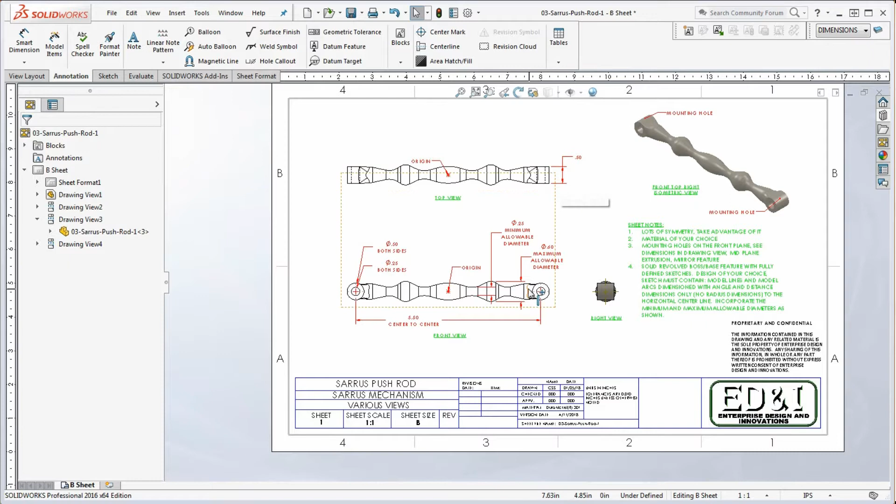And then we're going to do a bunch of freehand sketching in the middle. So let's go ahead and get started on this.

We're going to start with, you've got to consider the orientation of the Sarrus mechanism. We're going to be considering the front plane. And I'm not going to define a material here for you, I'm going to let you do that. It could be wood, plastic, some sort of metal alloy, steel, copper, aluminum, titanium, whatever you like.

So we're going to start with the front plane, and we're going to go ahead and begin to sketch. So it's going to make that normal too. Let's go ahead and put in some center lines.

So we're going to put the center line here down the middle. I'm going to go ahead and grab the center of that center line, select the midpoint, select the origin, and we're going to make that coincident. We're going to stretch that out just a little bit.

We're also going to be putting in a vertical one. So we could do the midpoint line if you want to do that. You want to make sure you convert that back into construction geometry. And then let's go ahead and put that in.

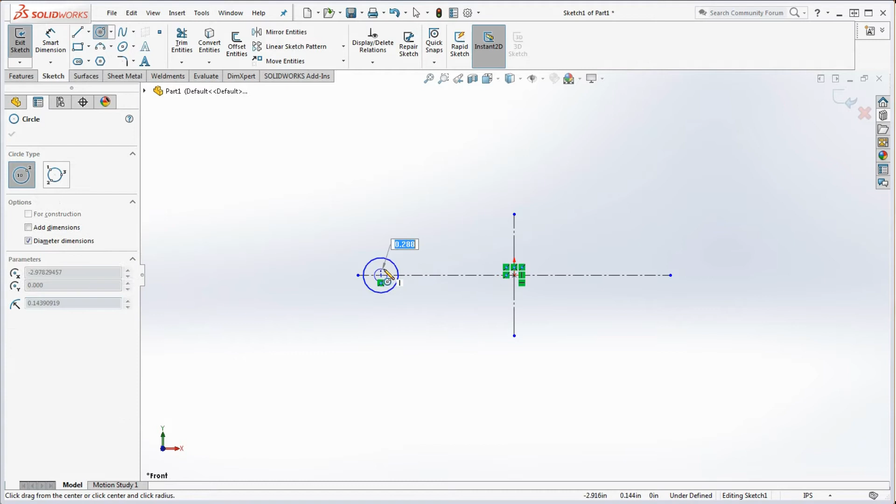So we're going to put in a couple circles on one side, and we're going to make those concentric circles if you want to do that. Remember, the inside diameter is going to be 1/4 inch, so 0.25. Outside is going to be 0.5. And remember the distance between the two.

If we were to click on any of these circles and go to that center line in here and then drop that on that side, double dimension or radius or a diameter dimension, that's going to be radius, single dimension. We're going to make that out there, make that 5.5, and stretch our center line so it goes through that. And then we're going to go ahead.

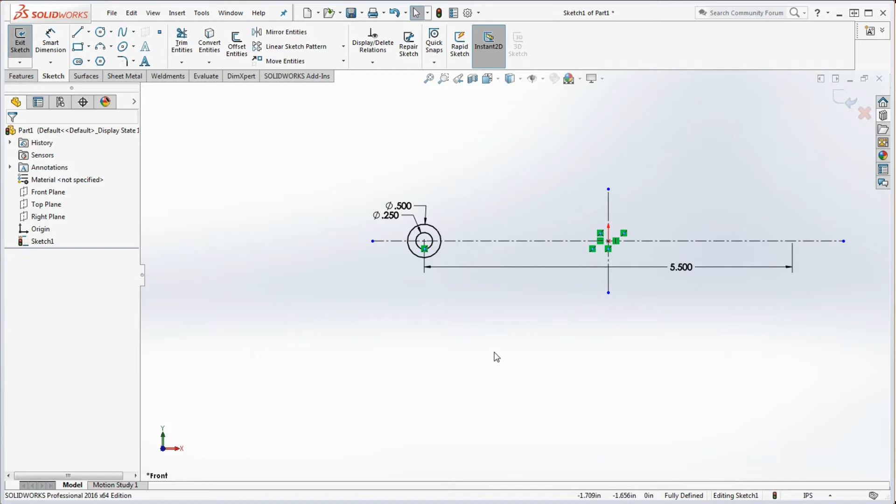Now we can do this one of two ways. We can mirror this as a feature or mirror this as a sketch. I'm going to go and do that as a sketch because I think I might save a couple mouse clicks if it did that. We're going to go ahead and select all that center line, our vertical center line in here, and now we're going to go ahead and mirror that to the other side. So now we have that in place.

We're minimizing our dimensions. We only have 3 dimensions that define this whole thing. You don't want to go over here and add the same dimensions you have over here. It just looks really hokey when you put that into a drawing.

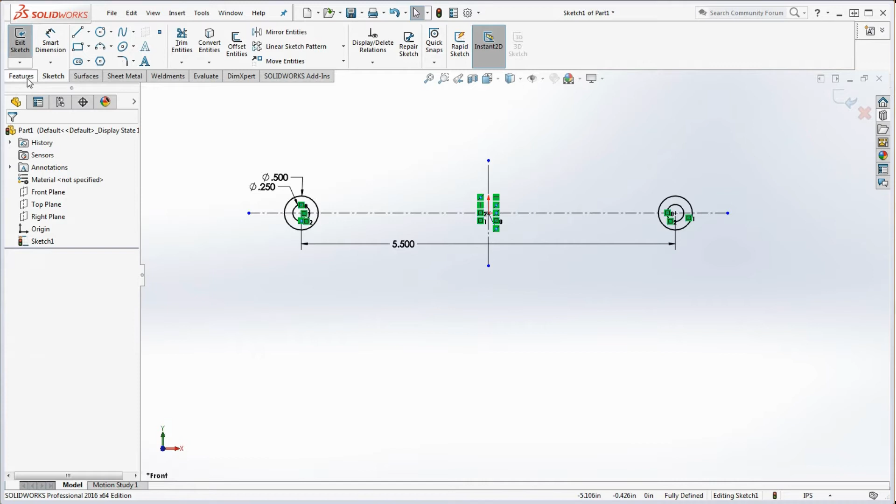So let's go ahead and extrude this. Extrude boss base, mid-plane. You want to make sure you do mid-plane. So we have that plane that's going to be right down the middle, which is going to be the front plane. And we're going to give that a specific distance of 1/2 inch. And then go to the green check mark.

Okay, so let's not forget to rename our features. We're going to call these our connection bosses or something similar to that would be good. So connection boss, typically not a dash in there, but we'll just call it that, or we can call that our base feature if you want to do that.

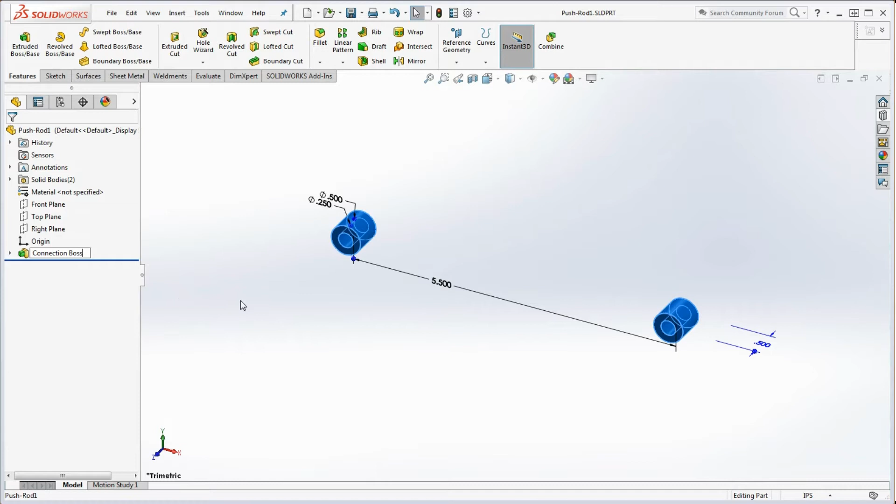So the next thing we're going to do, we're going to go right back to the front plane. We're going to go ahead and sketch on that, and we're going to do the same thing as before. We're going to start with some center lines in here. So we're going to go to sketch, go to center line, and go ahead and do kind of like what we did before.

And we're going to make sure that these stay in the middle too. So I'm going to select the midpoint in this, go to the origin, we're going to make that coincident, stretch it out a little bit. You can do the same thing going vertical.

I hate to do the same thing twice, so I'm going to go ahead and do the center line and exaggerate that a little bit. Right click in this, go to midpoint and select that. We're going to make that coincident. There's one thing we want to do here too, you'll notice that's not black, it's still blue, so let's exaggerate that a little bit. Select that, let's make that vertical. You want to make sure it's black.

Remember, the endpoints of a center line don't need to be fully defined for the sketch to be fully defined. So if we rebuild that as sketch number 2, it doesn't have that minus sign, which means it is fully defined.

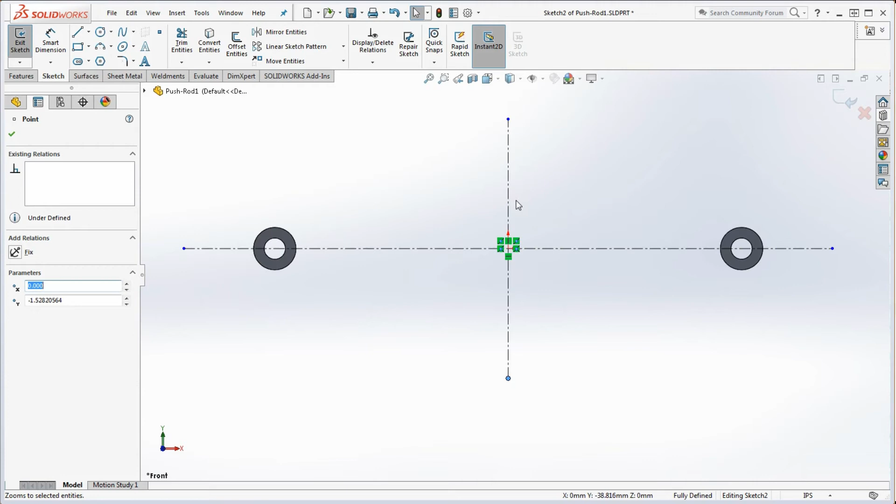So let's go back to edit sketch, put that in place, and let's put in our minimum and maximum diameters on what's going to be in the middle here. That's going to be the center revolve. So let's go ahead and do this.

We can put in a couple center lines off of this one. We're going to put one in, it's going to be 0.6. One's going to be 1/4 inch.

The way we dimension this, we're going to dimension that point to that line, because we can't really do the line to the line. If we try to do that and go over that line, escape twice here, once we do an ordinate dimension, it's not going to let us go over, it's just going to let us stay on that side. But if we go between a point and that center line, now we can do the single dimension or the double dimension.

So we're going to put that one in place, make that 1/4 inch, and this one's going to be 0.6 inches. One's going to be our minimum, one's going to be our maximum.

So we're going to go ahead and we can, if we want to. Again, we're kind of considering this for a drawing, but we can call this our maximum dimension.

You probably want to make that capital letters. It's a standard for drawings, you want to make sure you're using capital letters. I know in the modern sense capital letters means you're kind of shouting at somebody, or trying to get somebody's attention. But here, you are really trying to get somebody's attention in a drawing. So that's what you do.

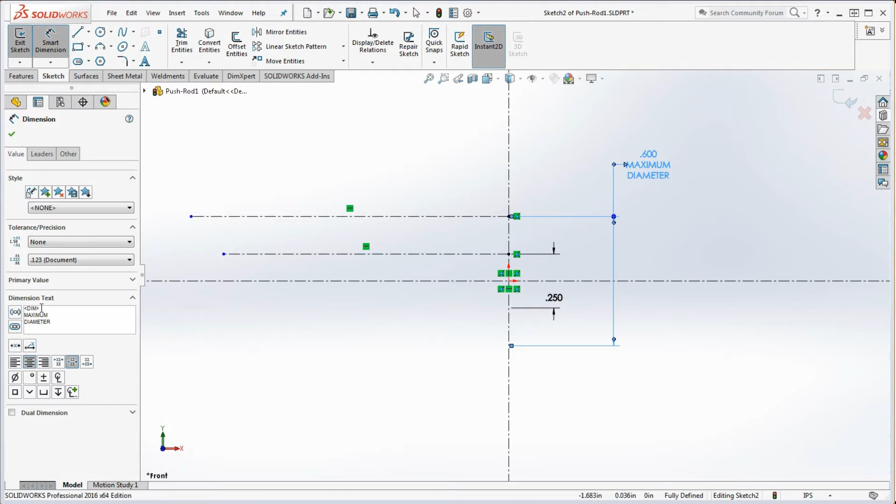That one of them is going to be a maximum diameter. What you do is click on that dimension, and below that dimension text, below what's in the brackets, it's going to give you the value that's in there. You can type in some text after that, or below it, or on top of it. I'm going to go ahead and borrow that, because I'm not a fast typer.

If we're going to do the same thing down here for the 1/4 inch dimension, we're going to put that in there, paste it, and this one's going to be minimum.

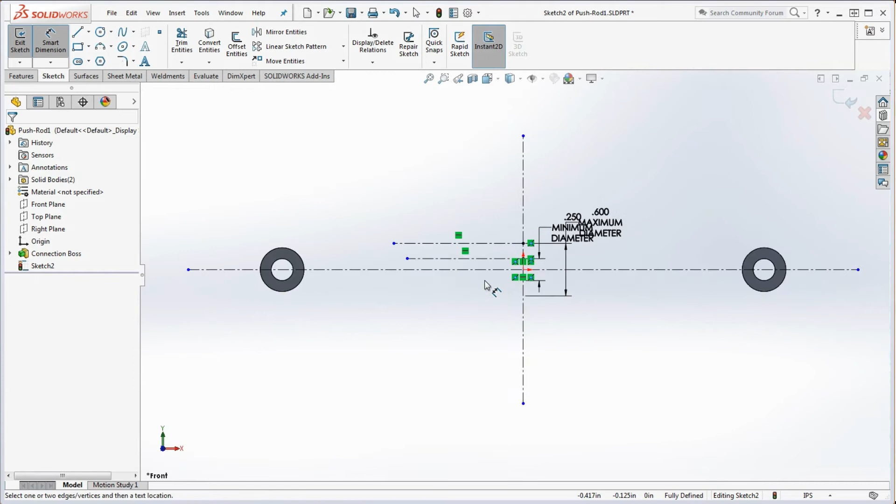Okay, so there's our 2 dimensions. We're going to keep that in place. We're going to stretch that apart, stretch that over here a little bit, and now we're going to go ahead and put in our dimensions.

We're going to put in not just our dimensions, we're going to put in a series of lines and arcs, and we're going to define this not by putting radius dimensions on the arcs. We're going to define everything to that horizontal center line.

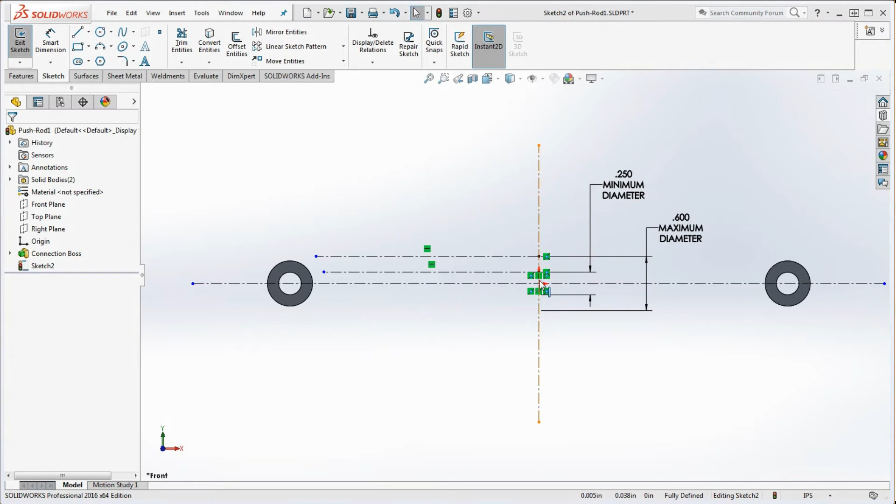Okay, so let's start putting in some of our arcs and lines. We're going to start over here on this line, over here, that vertical center line. We're going to sketch everything out on this side and just on the top.

And to maintain that symmetry, we're going to take everything we sketch out there, we're going to mirror it over to the other side. And then we're going to revolve that around. I'll show you how to do that.

Conceivably, we could probably use style splines or a spline to do this, but let's practice by using arcs and lines as a requirement for this part. We're going to use arcs and lines.

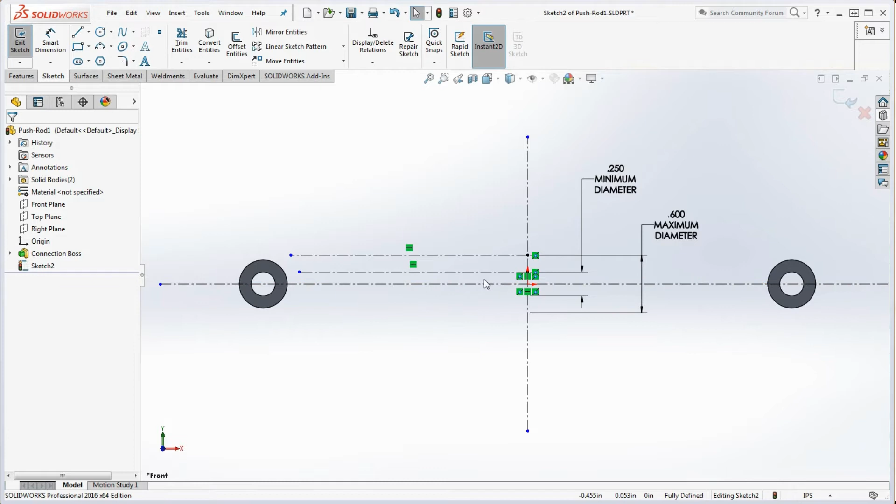I'm going to show you how to put that together without using radius dimensions. We're going to be using distance and angle dimensions instead. And we're going to be dimensioning everything to that horizontal center line, because that's measurable, we can measure from that.

So let's start with an arc. We're going to start with a 3-point arc. We're going to start over here, and we're going to sketch that down a little bit.

We're not going to go all the way up here to that line, which is going to be our maximum. We're going to make that in the middle sometime. And somewhere in the middle over here too, we're going to meet the minimum. So we want to make sure we sketch between these two lines. One thing I want you to do here too is do your own thing.

Don't put in the dimensions and the series of arcs and lines that you're going to be putting in here. Don't do mine, don't put in my dimensions. Do your own stuff. I'm just going to demonstrate this real quick, how you can do that.

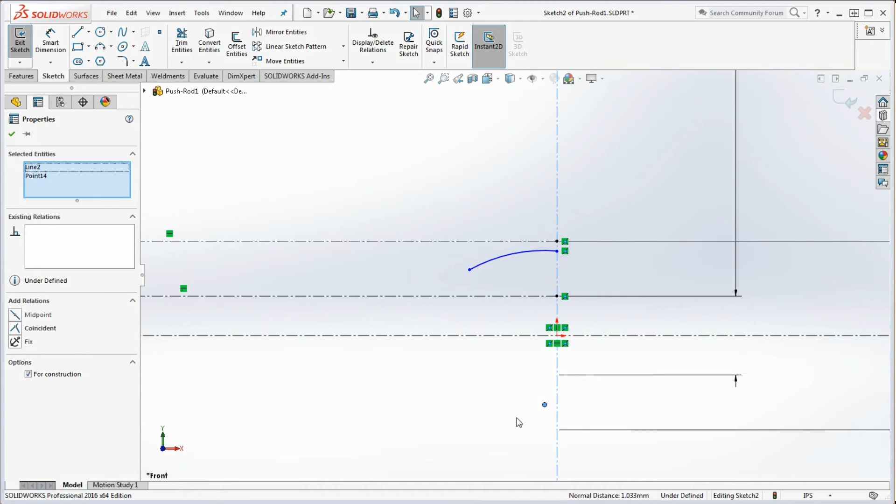So if you want to start with an arc up here, the center point of that arc's here. If you want to make that tangent to the other side, which you probably should do, we'll take the center point of that arc and that vertical center line, and make those coincident. So it'll be tangent to the other side, but when we mirror that over, we're going to have to redefine that a little bit.

So we're going to have to think about how we're going to do that. I can show you a little trick on how to do that too. Once you get that in place, let's go ahead and put in a line. We'll just go between arcs and lines. Make sure that that's a tangent.

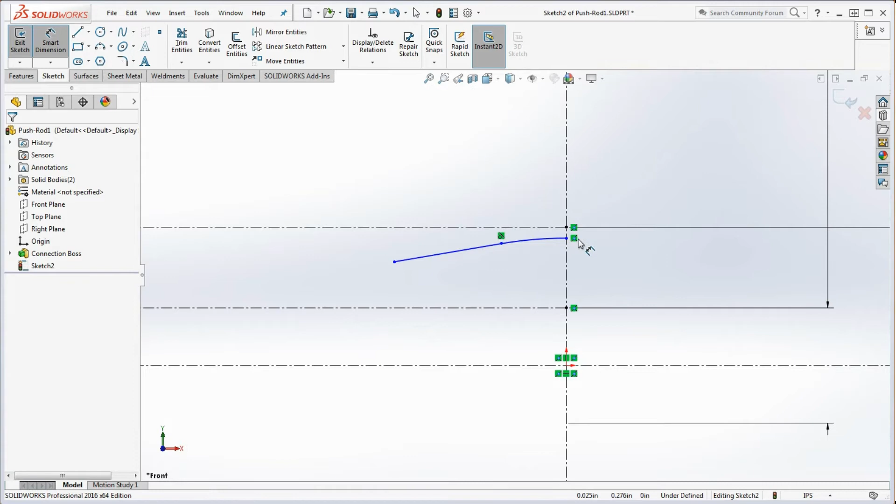Let's define that a little bit. So we're going to put in a distance relationship between maybe this point and that center line. We're going to go over halfway. Remember, you want this not to be a radius, but a diameter dimension. So this really is now a radius, but that's going to be a diameter. We're going to make that a diameter.

And don't have run-on dimensions in here. You don't want to have a bunch of digits after the decimal. Let's make that a little bit clearer and just type in 0.55. So now we can take this point and this line over here and define that too. Put that over halfway, maybe 0.5, make that half an inch. And it still isn't fully defined, so let's see what we need to do.

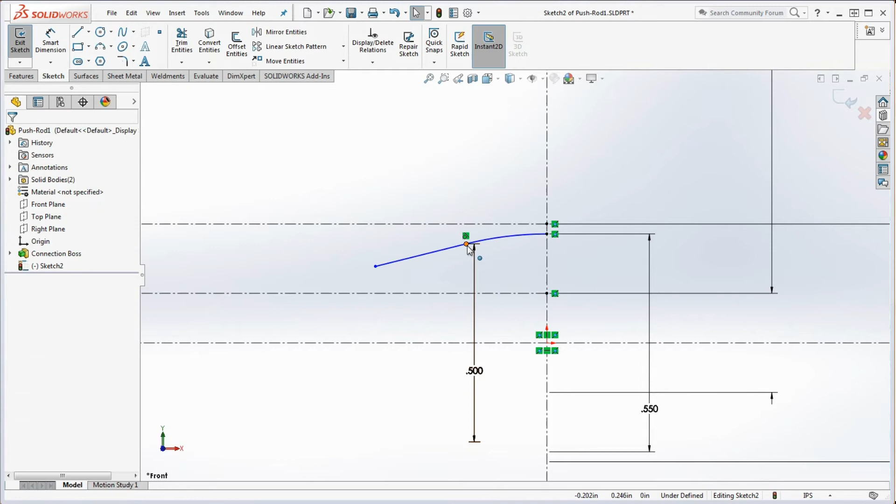You can see that with that straight line in there, we could probably add an angle dimension on that to get it fully defined. I'll define that arc. Or another alternative is to take a distance dimension between that point and that vertical line, which can't be measured very easily. So we're going to go ahead and put in that angle.

We're going to go ahead and click on this. If you get something like that, it's asking for an ordinate dimension. But let's click on that twice, escape twice. Let's go and put that in there.

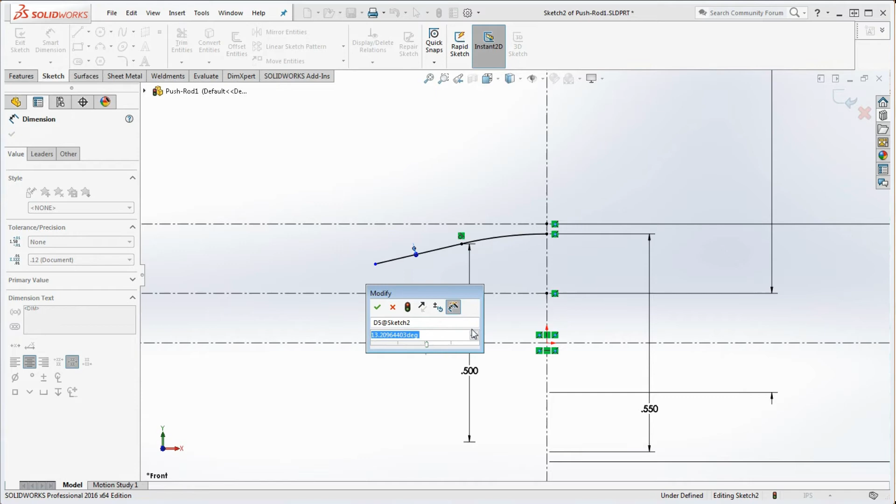Remember, you don't want a bunch of digits after the decimal. Let's make that an even, maybe 13 or 12 degrees. And what that does is it provides a blue endpoint at that line. Now we can stretch that out a little bit, and we're going to continue to work.

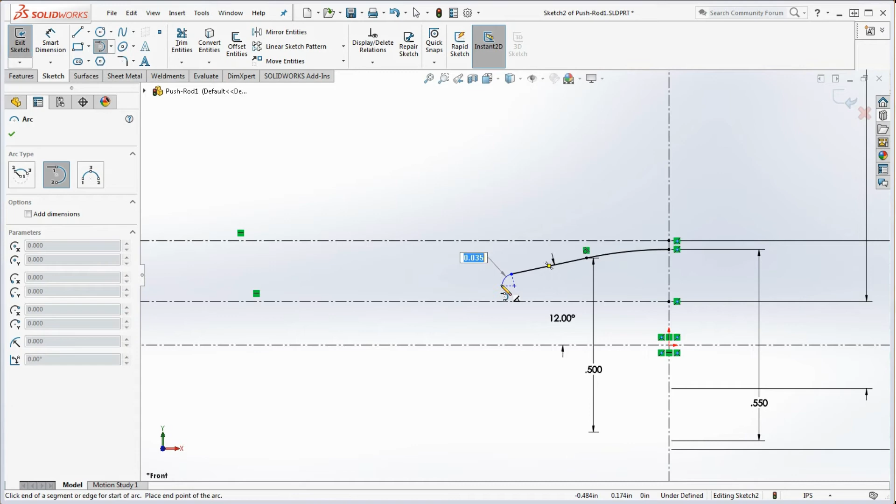So as you go, let's go ahead and define this as we go, and put in some more stuff here. Let's try a tangent arc. We'll go from that point over here, and it's going to make a tangent to that line that we have. Let's go ahead and sketch that up, and make that a little bit long over here.

Let's take the bottom of that arc, and now let's provide our minimum dimension here. So we're going to make that tangent, and that puts it into place. We can actually move that around a little bit, and squish that up.

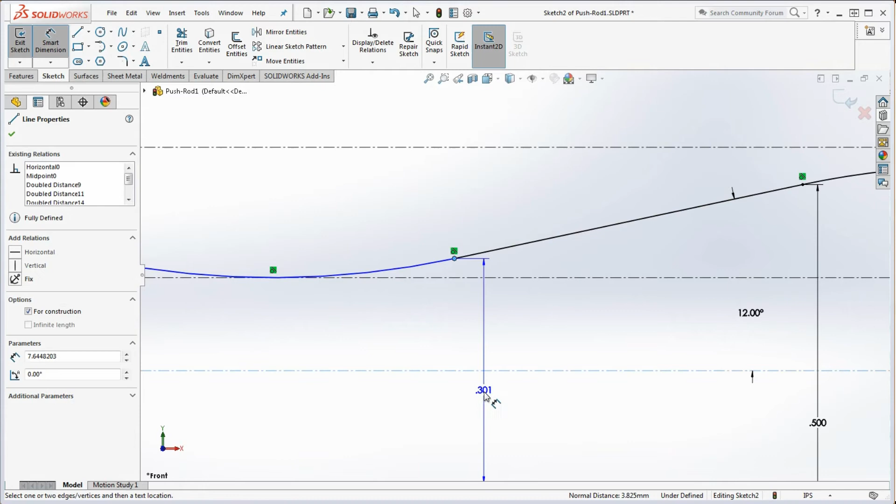Now we have that in place. So again, a smart dimension between this point and that line over here. Go over halfway, maybe 0.3, and that puts that into place. Now the endpoint of that arc is still loose and undefined, so we can add more stuff.

Instead of just putting in another line, let's put in another arc. Let's go ahead and sketch that out a little bit. Let's take that arc and make our maximum condition in here. So we're going to take that arc and that line and make that tangent, and so on and so forth.

Now we can put in, let's say, another line in here. Sketch that in here. We might be able to pick up that tangent relationship, which we did. And we can define this even more. So between this point and that line, we can see that maybe that's 0.5, close to 0.5.

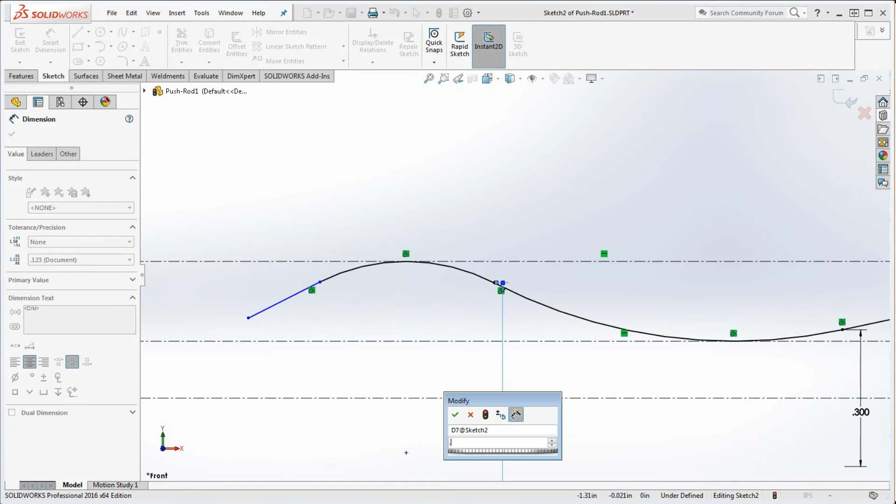We can put that in there. Between this line and that point here, we could do the same thing. We already had that center line selected. So let's make that 0.52.

Again, these are your numbers, so you'll put in your own series of arcs and lines, whatever you want to do. If you want to put in another line here with a sharp corner, you could do that too.

So let's do that. And just for the fun of it, let's go ahead and maybe make these - is that a little bit too steep for perpendicular? It might be.

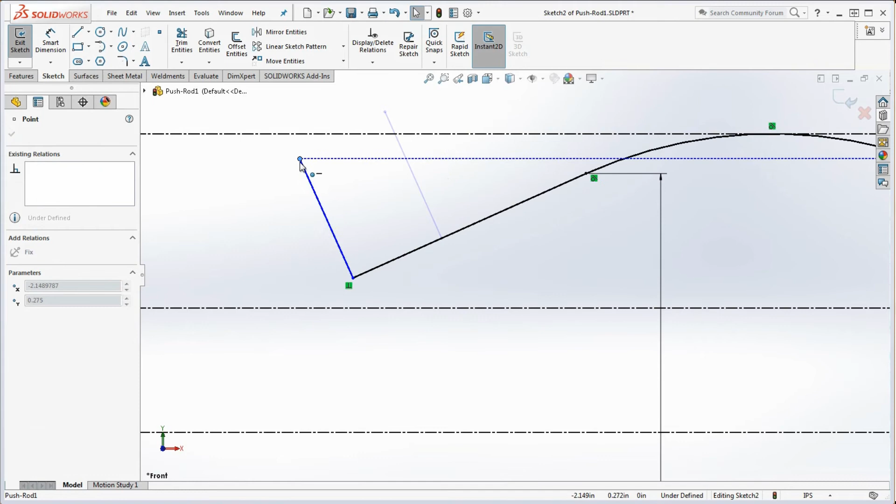But we could do something like that. Then we could put an arc in on top, maybe a tangent arc. Go ahead and put that into place. And if you want to, we can make that tangent also up here.

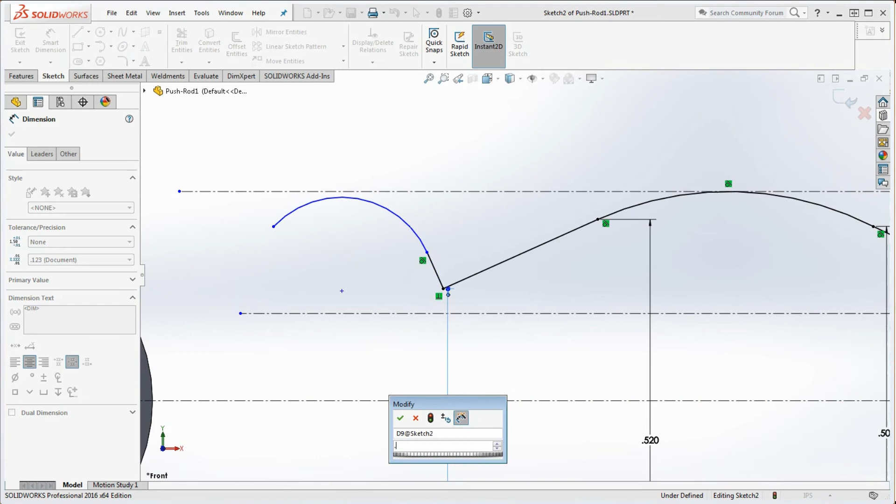But we want to put a distance dimension between that point and that line. We're going to go over halfway and maybe make that 0.3. So that's a shorty.

Now if we want to put a dimension between maybe the top of that arc, not at the maximum condition, and that line here, we could put that in too. We're going to keep that undefined a little bit - we'll come back to that.

But let's take that dimension and put that in at a maximum condition. So go to leaders, we're going to make that maximum, and now we're going to put in something less than 0.6. So 0.58 would be good.

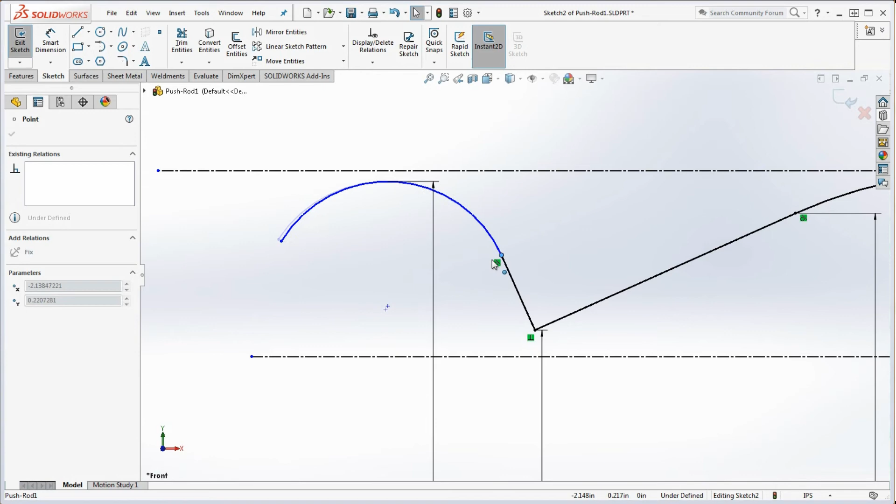Now that's not fully defined, so before we go, let's make sure we get this fully defined. Let's put a dimension between that point and that center line here. Maybe make it 0.4. So now we're almost done.

Let's take the endpoint of that arc, still underdefined. Let's put in one more tangent arc from that line over there to maybe the edge over here, to help define that a little bit better.

And again, we can put in a dimension between that point and that center line here. Put in your own value, maybe 0.52. Do some rounding, and now let's go ahead and complete this.

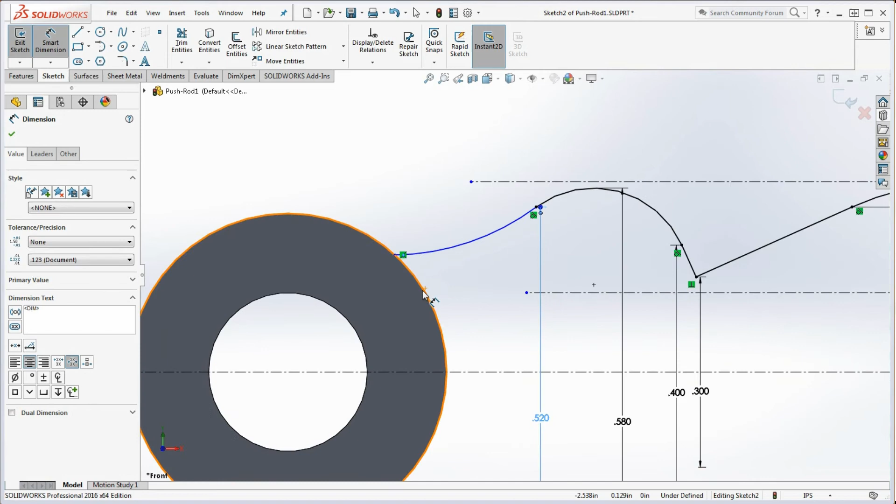If we take the endpoint of that arc and see what we need to do, we could probably define one more distance relationship. Let's make this 0.34.

Now let's go ahead and take that endpoint and take a vertical line right in the middle of that boss that we put in there, and put that down.

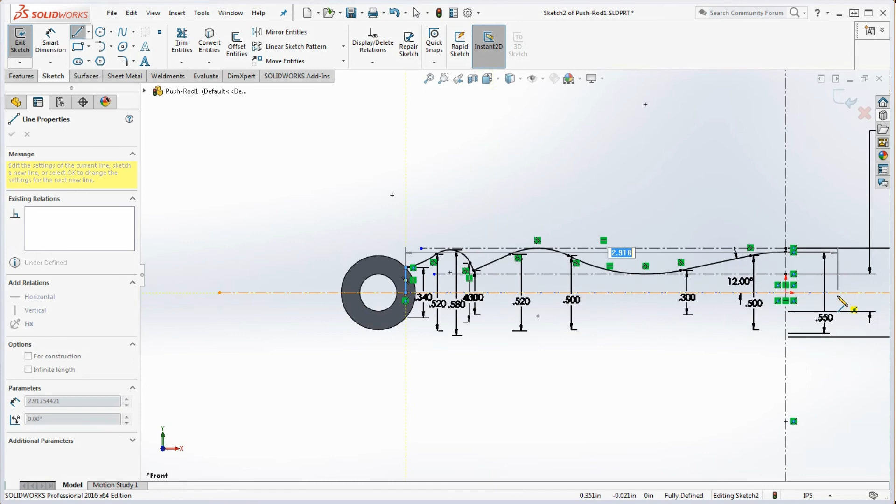Now let's go all the way over here to this side. In fact, let's put in that last. You definitely want to have something that goes down here like that, because that's going to complete this cycle that we have in here.

So with all these connected lines and arcs, we want to make sure it all terminates on that vertical center line, or that horizontal center line here. Everything's going to terminate on that.

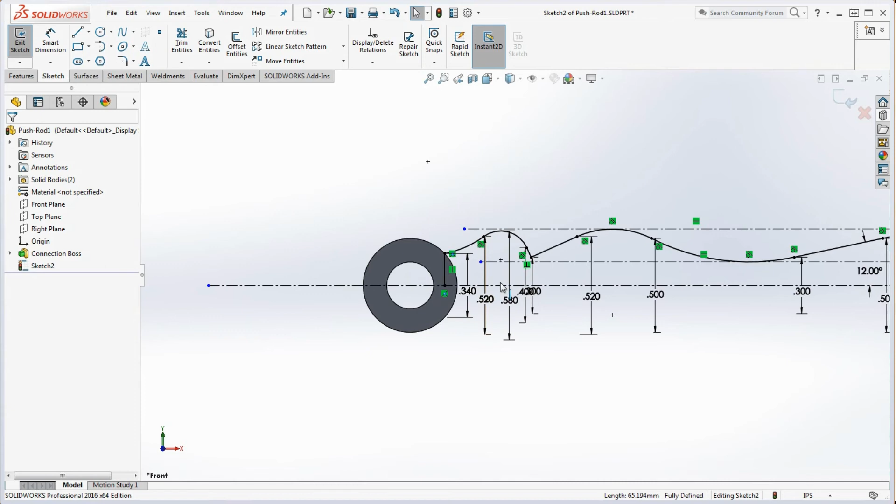So when we mirror this over to the other side, this part is going to be over here on that boss, and you want to make sure it all ends on that horizontal center line.

So let's do that. Let's right-click on this, go to Edit or Select Chain, and with the Control key depressed, let's go to that vertical center line. Now we're going to mirror that over to the other side.

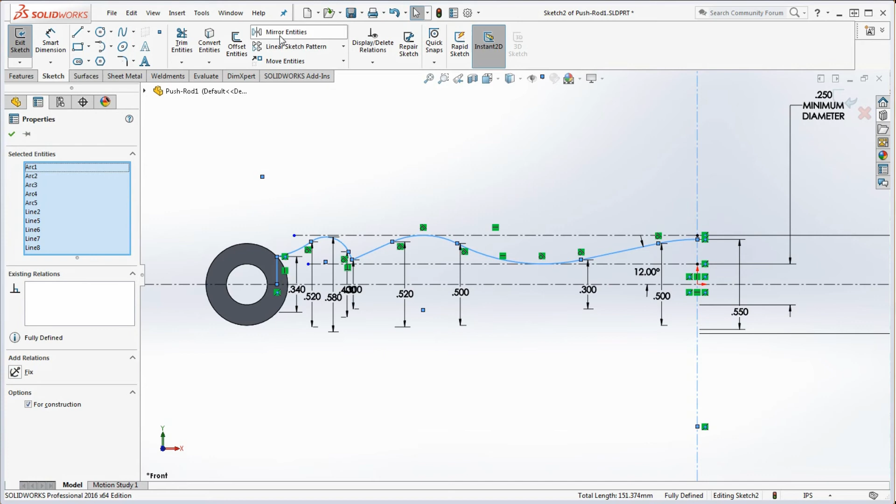And remember how we had that defined before? It's not defined now, and what isn't defined is over here, where we used to have an arc that used to terminate right there on that vertical center line. It's not there anymore. We do have symmetry, so whatever we do on one side is going to work on the other side too. But let's do this.

We're going to take a point, and put that point on that line. We're going to take this point and that arc with the Control key depressed, and click on midpoint. And we're going to take this point and that vertical center line, and make that coincident too, which it already is.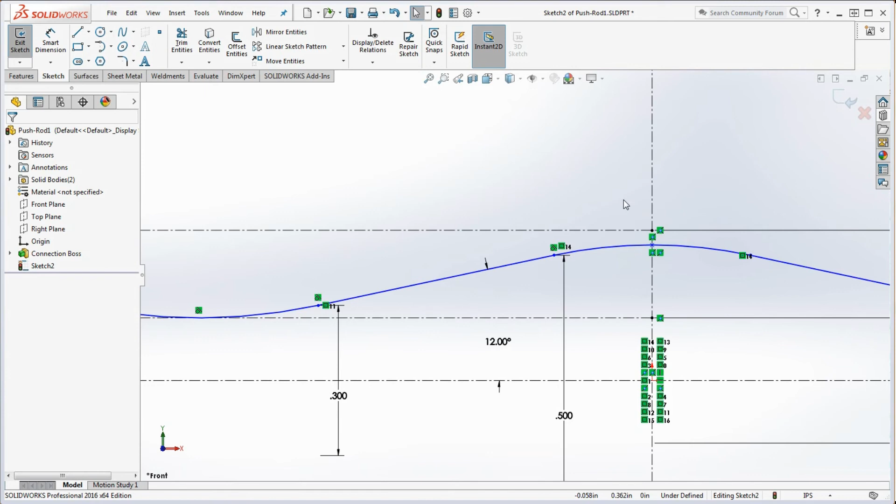So what did that do? Well, it provided us a point that we'd actually make a dimension on. So now we can actually put a dimension back in there. It defines an initial step. And if we go to that between that point and that horizontal center line, now we can define that. So maybe 0.54 would be a good thing to do.

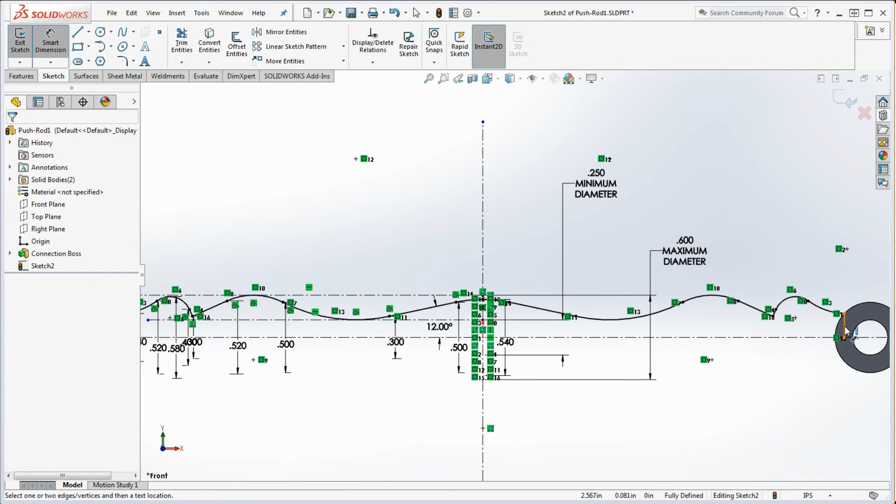Now it's black. It's fully defined. We got the end caps down here with that vertical line, right in the middle of those bosses that we have. You want to make sure you don't violate the hole in here, but you also want to make sure you're at least on that boss, you're connected to that boss.

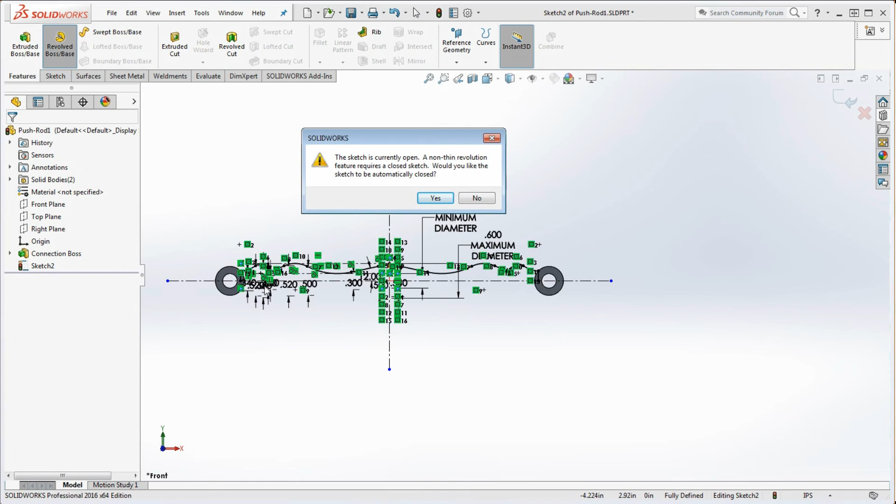So once we do that, now we can revolve this. So if we go up here to the features, go to the feature tab, Revolved Boss/Base, and it's asking if you want it to be closed. So let's think about what we need to do here. We have this open feature in here, and if we were to do an extrude boss base on that, it would provide a thin feature, it would add some thickness to it.

But with Revolve Boss base in here, it's going to suggest that between these two endpoints, the endpoint over here and the endpoint over here, and those two vertical, short little vertical lines in the middle of those bosses, it's going to take a line and automatically put it between those two, if we didn't do that ourselves. So we're going to say yes here, and watch what it does. It's going to put that in there.

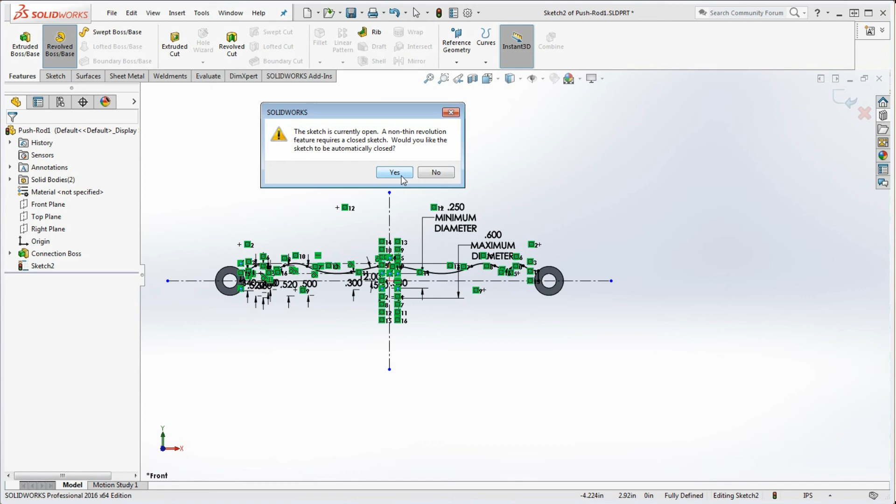So axis of revolution is going to be this guy. Now you can see the yellow preview of what we're going to get. If we go to the green check mark, now we have that in place.

So remember, this is your own design. I don't want you to emulate my design. You put in your series of arcs and lines with the dimensions of that horizontal center line in there and get a shape that you like. And if you don't like the shape that you have, if you don't like this corner in here, go back in there and get rid of some of those lines that we have in there. Maybe that perpendicular relationship, maybe some other elements in here. Redo that as you see fit, but make sure you do meet the minimum and the maximum values that we have in here, because I'm going to be checking that.

And make sure you do your revolve too. Make sure you rename that feature. And we're going to call that our center revolve. Just something descriptive besides just revolve one. So that's a part of renaming your features.

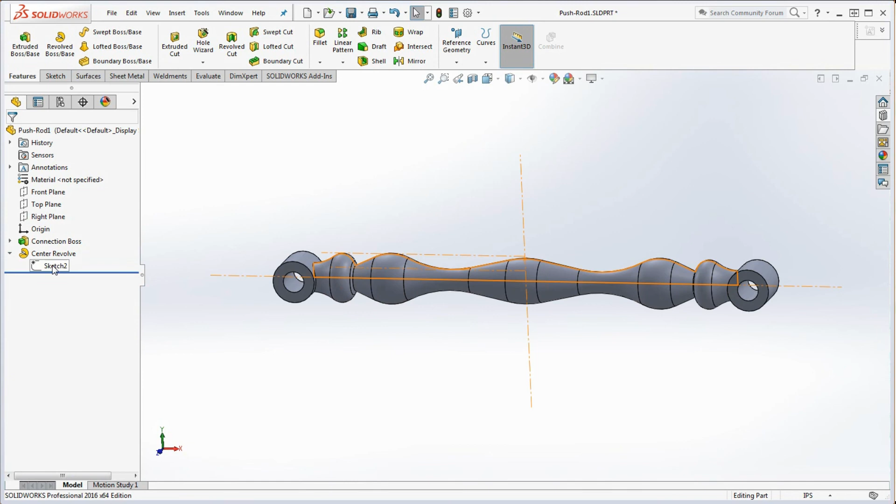Now let's go ahead and take a look at the sketch that's in here. So if we look at our sketch 2, remember we did not have that line in the bottom, and the SolidWorks added that automatically. This is the reason why we had to take a point, or take a line from that point down here, a vertical line from that point in there, all the way down through the middle of that boss to that center line. If we didn't have that, if we just had to terminate here, the SolidWorks would try to put a line between that point over here and this point over here, and that would have goofed up a lot of our geometry.

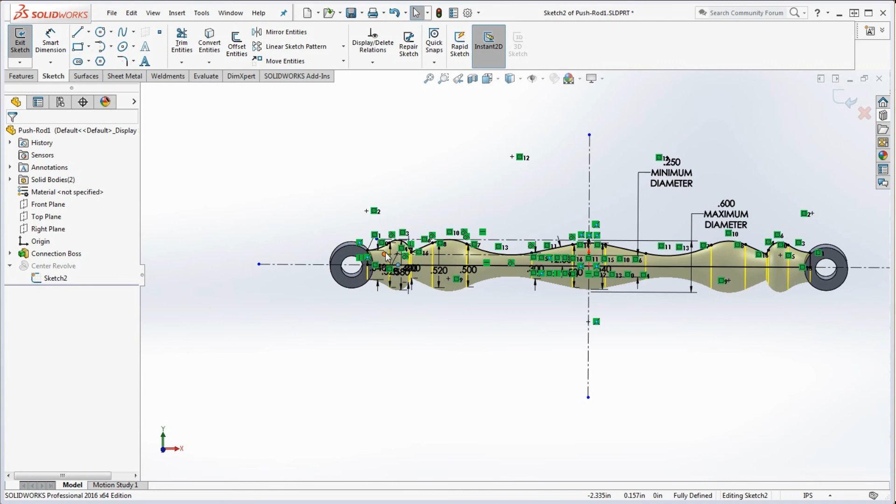We would have had some solid bodies kicking out here, or I suspect it probably would not have resolved itself. But we could have also taken a line as our very last step from that point over here to this point over here, but SolidWorks would do that for us automatically, so we just let them do that. So there is our push rod.

Okay, one last little step. Let's put in a fillet in here. I was looking at this. If you look at this and you're yanking and cranking this a lot, guess where it's going to break? It's probably going to break over here at a minimum. It's not going to break it to maximum. It might break over here because we have a sharp corner. It might break over here where we have our boss. So let's put in some fillets just for the fun of it.

And let's go ahead and define it. Especially if yours comes to a sharp corner down here, fillet might be a real good thing. So 1/10 of an inch, we could try that. We can go ahead and click on that edge. It kind of shows you that preview.

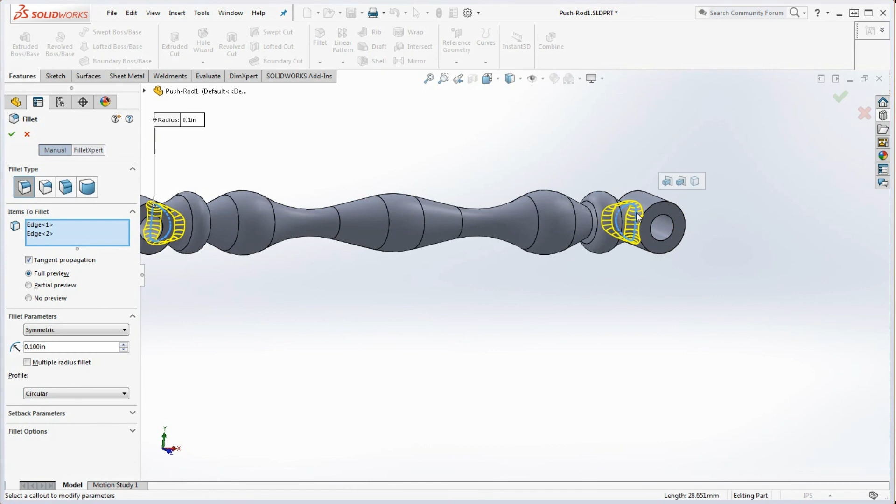We do the same thing over here. Click on this edge over here. And maybe over here, if you don't like that sharp corner in here, see what that does? It's going to smooth that out a little bit. But definitely you want to put it here at the very ends where it connects down here. It just provides a nice smooth finish to it. And if you go to the green check mark, there. Now I promise, that's the end of our push rod.

So there you have it, our push rod. Let's put that into our Sarrus Mechanism.